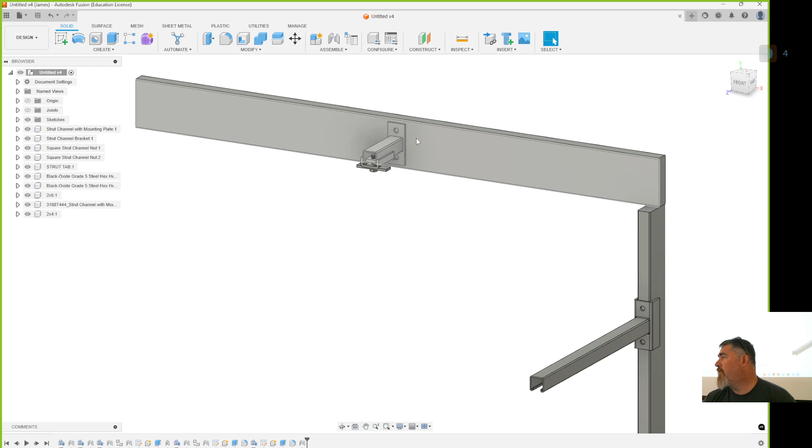Here we are in Fusion. We've got, this should look familiar, right? Yeah, that's our thing we did for the joints command. And so I've kind of gone out and made some other pieces.

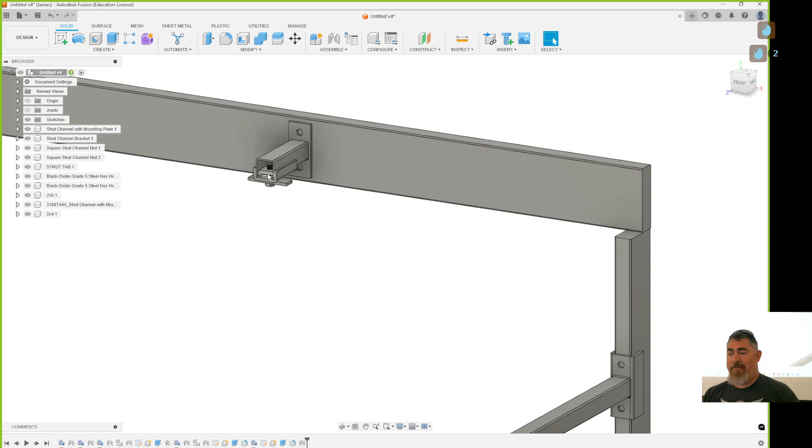So let's say we've got this assembly here, and we're going to be reusing some things. Like maybe on this beam we want to have 2 more of this little stubby connection, but also this piece that slides, we want that same basic thing with the same nuts and the same screws to be able to put down over here. We could re-import all the stuff and do it all again, but that's going to be a lot of work, right?

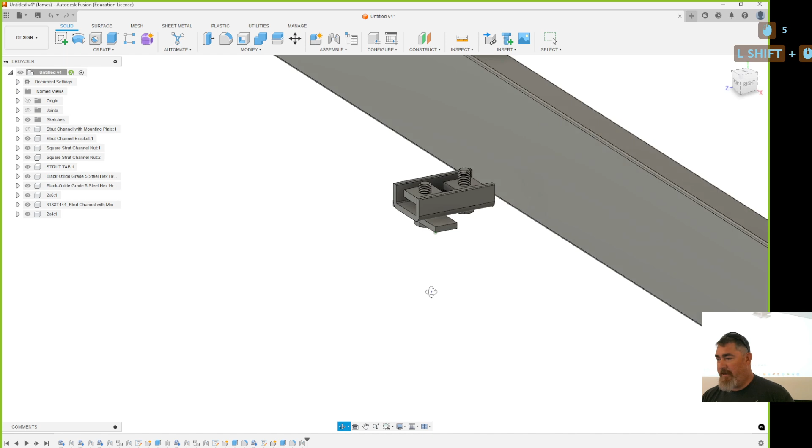So if we know that we're always going to have the same thing, basically this little piece right here is always going to be that same unit all the time. We want to be able to pre-assemble that so we can just slide it onto the strut. So let's turn this into a component. We make a component and put all of these pieces into that one, then we can move that component as a group. Does that make sense?

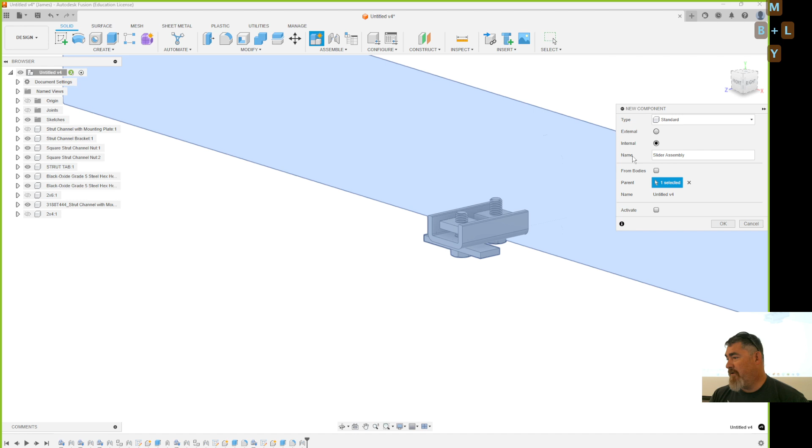Yeah. So I'm going to make a new component, and I'm just not going to activate it. I'm going to call it slider assembly. I'll say OK. And so that made my slider assembly here, and there's nothing in it, right?

So if I take all of these pieces here, so the bracket, 2 square nuts, tab, the 2 screws, and drop those in that slider assembly. Now if I just grab this and say move, I can move that whole thing.

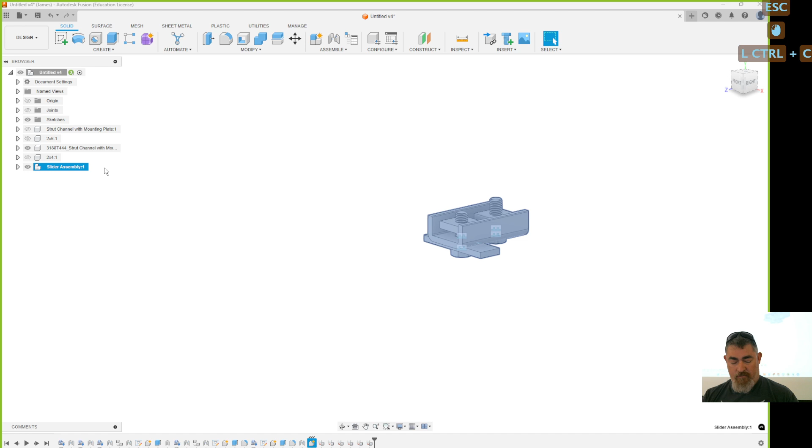So this one is kind of stuck because it's already got that mate, right? But if I create a copy of this and put it somewhere, now I can turn this other stuff back on. This one can move around, this whole unit. So now I can go in and say, I want to do a joint.

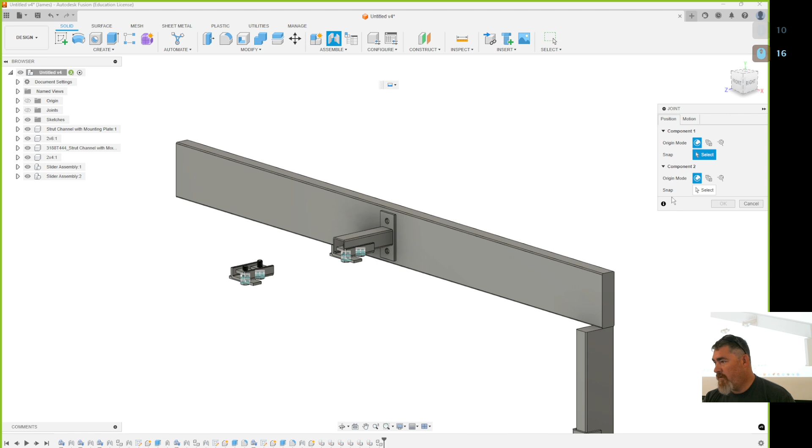And I'm going to go midway between faces, that face, and that face, and the bottom there. And then for the second piece, I'm going to tell it to be that, right? So, I don't want that.

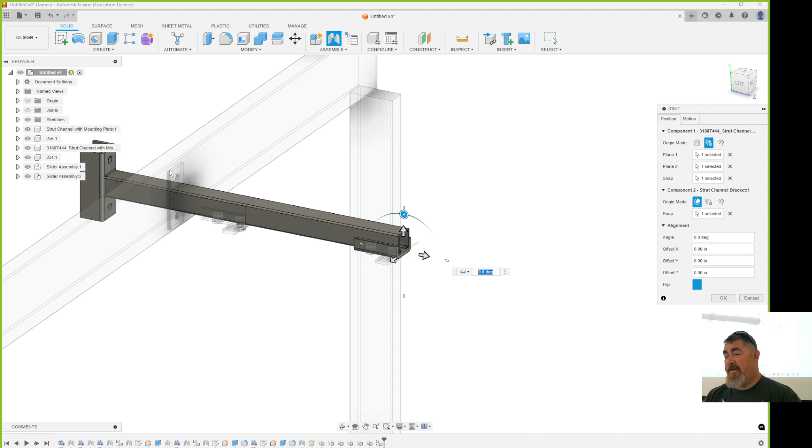What happened? So the first thing you pick is the thing that's going to move. Okay? So I've already constrained this over there, though, I've already added a joint. So if I say OK, now it's going to... oh, I guess I didn't make a joint between these 2 pieces.

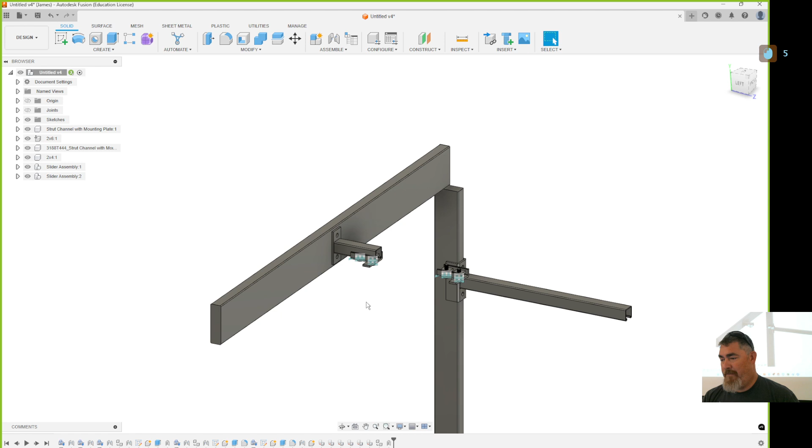So let me go back, and I'm going to pick this, and tell that to ground that. And then I'm just going to do an as-built joint between that and that. Okay, now when I do that other joint, between mid faces, there, bottom corner, it still looks like that's going up there, right? But when I say okay, I'm going to move it over there because that's where that thing has already been jointed.

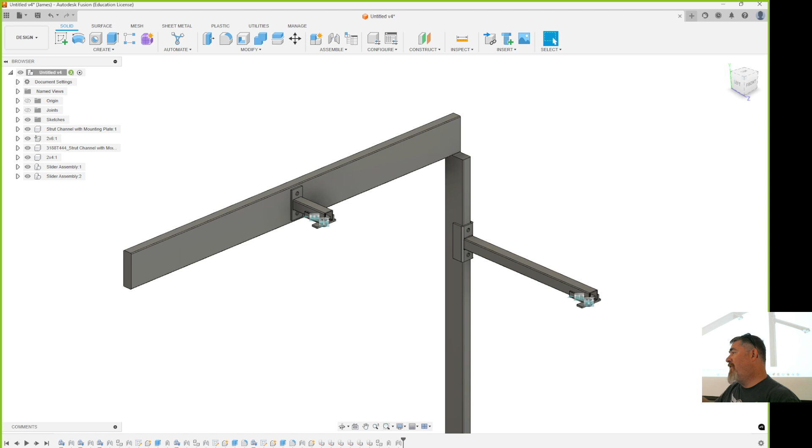The better thing is just for the first thing you pick, the thing that's going to move. So if I go here and do the joint, I pick here first, and then I pick over here. Then that goes, and it only moves that one subcomponent there just for the preview. So don't be worried like, oh no, I want everything to go. Get this set up the way you want it set up.

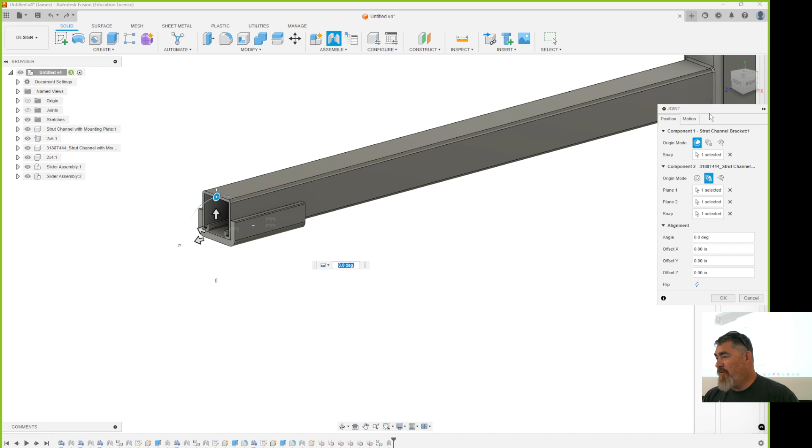So I want to slide again, but not that way. Not that way, that way. No, that way, that's the way I want. So maybe I don't want it to start at the end, I want it to start in here somewhere. Get it set up, hit OK, and now the other parts join the part. Okay? Does that make sense? So I got that one.

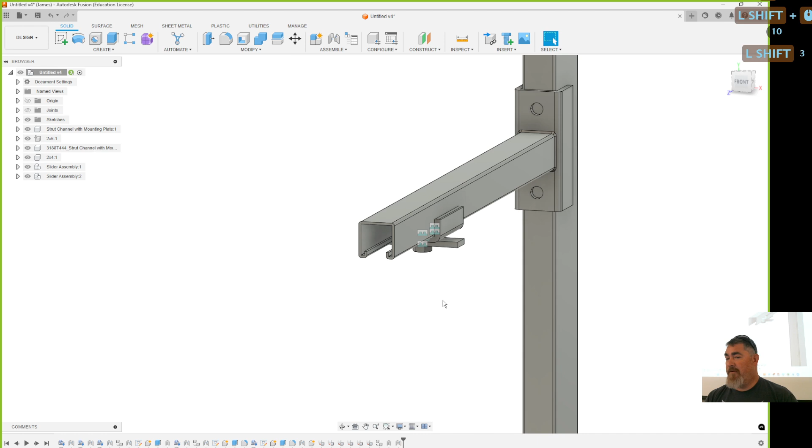Nice. But I want to have a couple of these that are exactly the same. I want this little stubby piece of the channel, as well as the slider thing already there. Yeah, so I'm going to make a new component, same thing. I'm going to call this one stubby.

And I'm going to take this first one and this piece of that channel right there, and put those two in that one. So this one can't move, right? That can move in and out, but this thing can't move. Why? Yeah, it's already fixed to the origin, right?

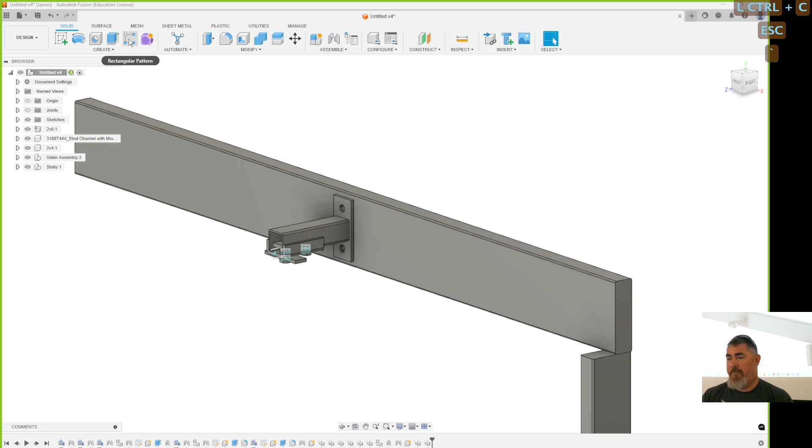But if I take the stubby assembly here and I copy that, let's just do a pattern, right? On a pattern, a component, stubby, pick an axis. We want 3 of those there. Now these can each move though, right?

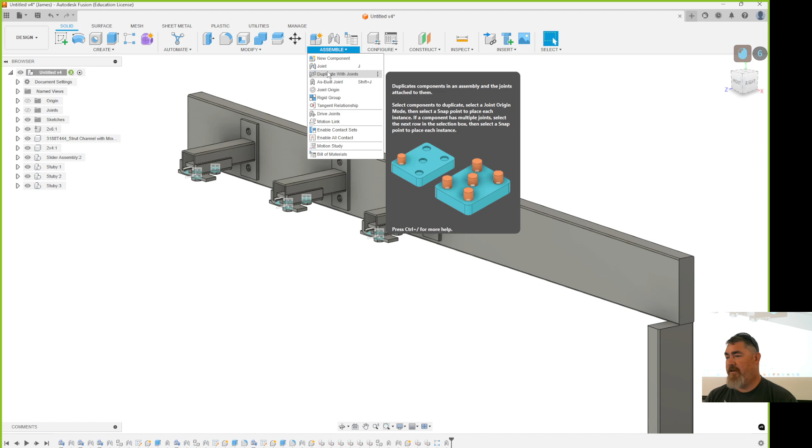Because when I make a pattern, it doesn't recreate the joints. But now I can just easily add as-built joints between there and there. Yes, I am, I just double checked. As-built joint between there and there.

Okay, and now the sliding joint works, those are already set up. This thing works, and there's that. And so now I have a component here that has a component there and a subcomponent, which then has those components in there.

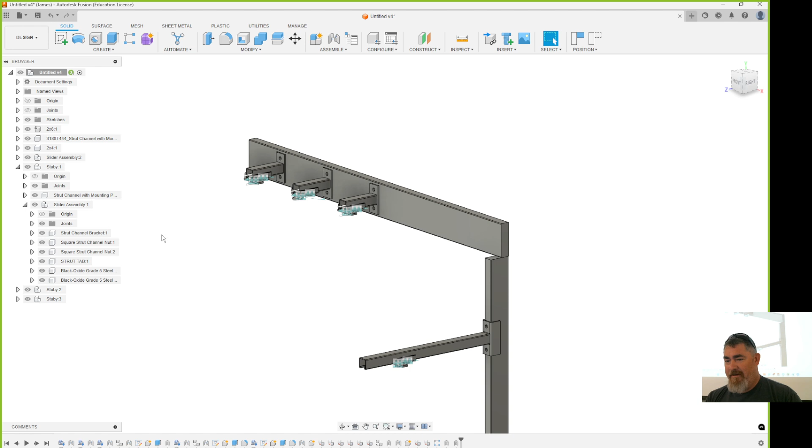So does that kind of show you how you can have components and other components and other components? So that's subcomponent or sub-assemblies. Basically, this is a sub-assembly of these parts, right? Those can be put together ahead of time. And then we can take that sub-assembly and stick it with this one other part, or other parts if needed, and those could be sitting there on the side. And then we can reuse that whole thing. Okay? Does that make sense?

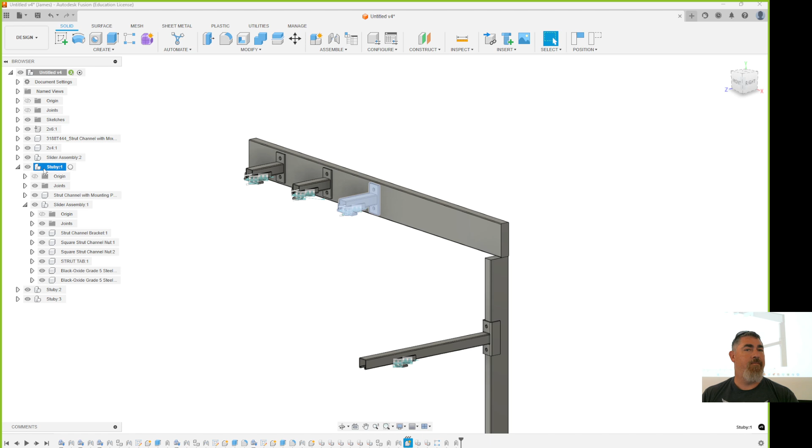And it could also be like you're putting together one thing, and maybe you're not reusing something, but you've got a big assembly. You want to put together 5 pieces first, then another 5 pieces, then another 5 pieces together, and then put those 3 big sections together. So each of those 5 pieces would be a sub-assembly component with those subcomponents in it. Okay? Does that make sense? Any questions? Oh, all right.